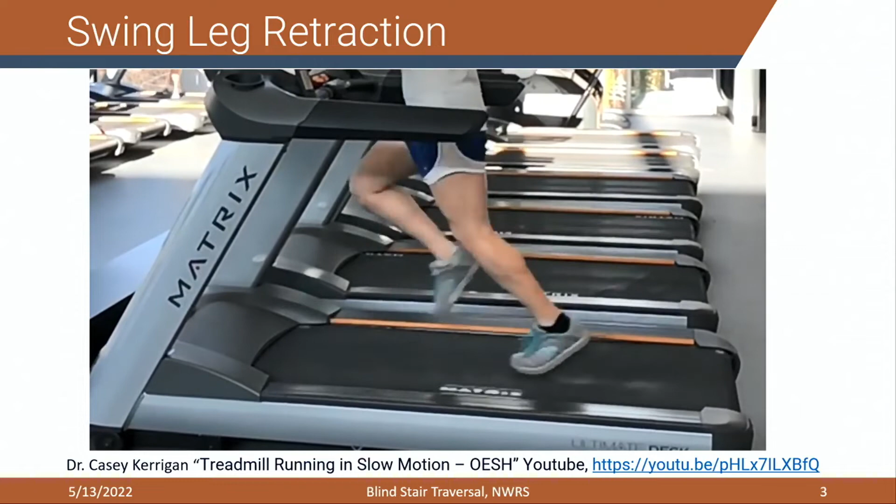One key feature we thought about is swing leg retraction. When humans and animals run, before your foot touches the ground, you reach it all the way forward and start to pull it backwards. There are a number of reasons why we do this. For one, if you minimize the difference in velocity between your foot and the ground, you'll lower the impulse when you impact it, which is better on your joints and you should lose less energy.

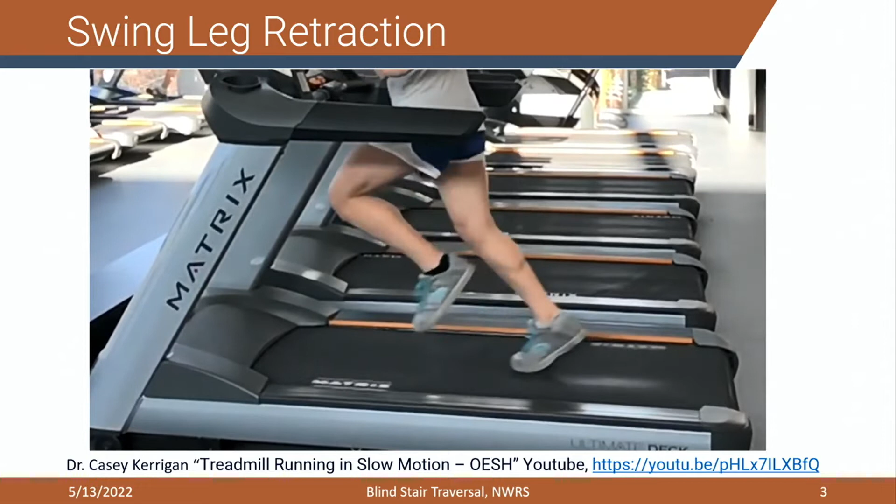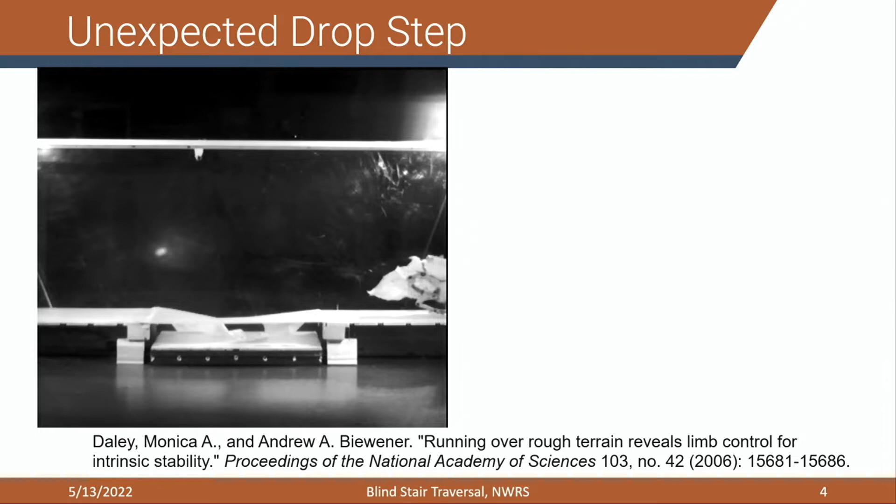But it also has a really interesting effect on your gait dynamics by swinging the leg backwards at the touchdown point. This is the classic video—if you've seen any talks from our lab over the past 8 years, you may have seen this. This is a Monica Daley experiment that is super fundamental to how we understand what's happening in gait. A guinea fowl is running along, being prodded with a broom by a grad student behind it, and there's tissue paper over a gap.

So they think they're just running on flat ground, but as soon as they try to put the foot on it, it breaks through. What you're studying here is how does the bird respond to an error in perception—the ground is actually lower than it thought it was. What does it do? A really interesting thing is if you look at the leg angle, it's sweeping the leg angle back.

You can illustrate this with some still frames: if you're up above the ground, you have a steep leg angle, and it gets shallow, then gets steeper and steeper as you swing it back.

So what this does is it gives you what we call a preflex—a pre-computed reflex. If the ground is higher, you get a shallow leg angle. If the ground's lower, you have a steeper leg angle. So you're basically able to react to the ground without sensing it in any way, altering your gait dynamics so you can recover over the next couple steps. So we thought this was going on. Let's jump back now and look at how this all appeared.

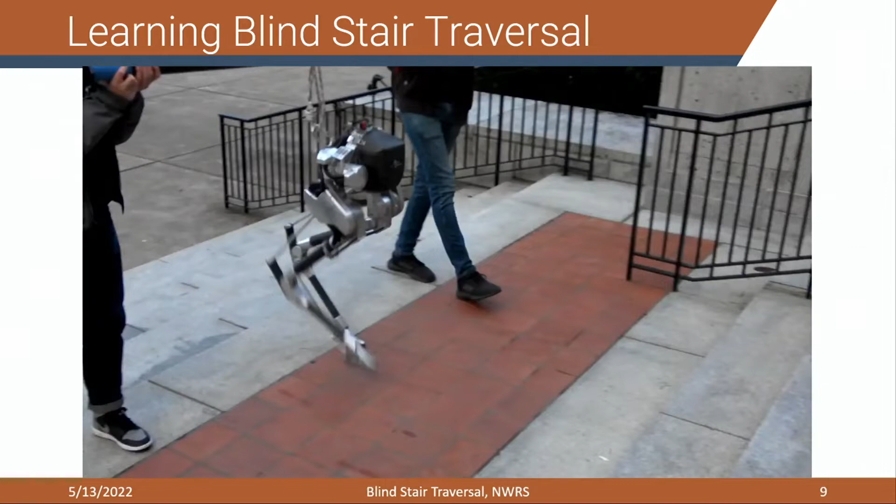And some more videos. And we found it even extrapolated to at least single step downs well outside of the training distribution, or 1 foot always up, 1 foot always down. It was able to handle that pretty cleanly.

Or even things that aren't really stairs.

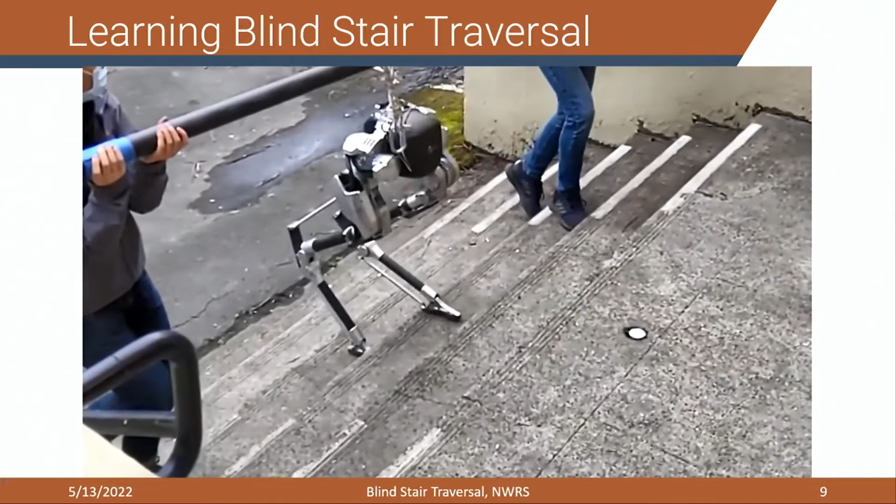So here's a nice slow motion of that phenomenon where it doesn't quite make it up a step. So we see here it's about to catch this toe. And it tries to put force on the heel, but it's not on the stair.

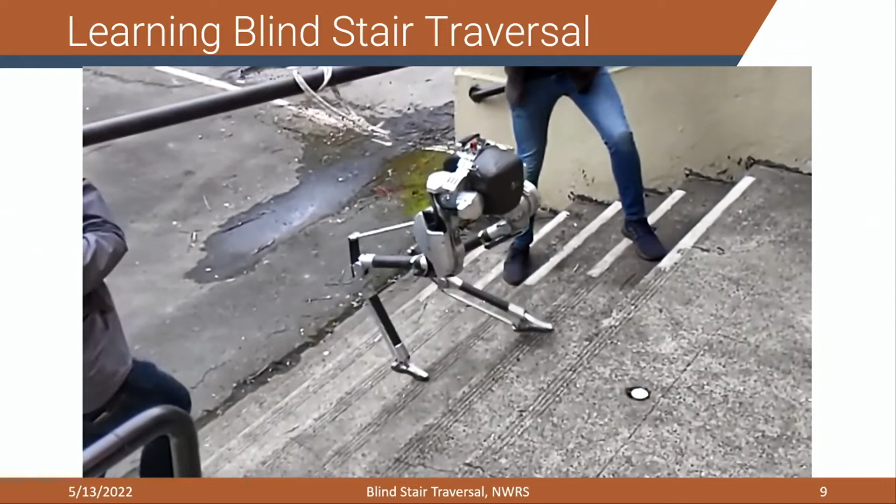It'll catch itself, and Jeremy and John, trying to support it with the pole, are trying to react as quickly as they can. And it's able to make its way back up.

And so coming back, we had this idea that swing leg retraction is part of what's going on. So we can actually inspect these behaviors.

So we can't really tell what it's doing. This is a giant black box. But we can at least look at what it's chosen to do.

And so this is really exciting to see, but we can't say this is what's making it work. There's lots of different things it figured out, but it's just really exciting to me to be able to see some behaviors come out of these reinforcement learning problems that are biologically recognizable. All right, and with that, I'd like to thank you for your time and ask you any questions.

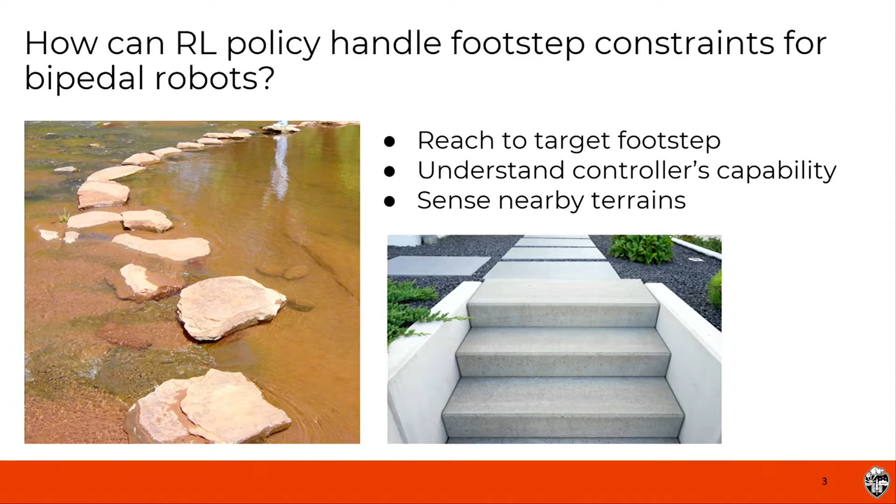To be able to handle such constraints, the robot and controller have to satisfy a couple goals. First, they have to reach a target footstep at every time. Second, they have to understand the controller's capabilities of where it can control the robot to land. It has to build up this knowledge of, if I'm taking a footstep right now, where am I going to land, and where am I able to take more footsteps in the future. On top of this, there has to be some sensing mechanism, like a perception system, that tells how the nearby terrain looks.

In this work, we're really trying to figure out a control hierarchy towards this goal by addressing the first two points. For the first point, we wanted a control policy conditioned on the footstep. We abstract the policy so we can tell it where Cassie wants to land, send this command to the policy, and the foot will actually land at that particular touchdown location. We try to abstract the policy training around footstep commands, and we train this policy in simulation.

As we saw earlier, we have this sim-to-real pipeline built up, and we're able to train Cassie to learn a range of footstep locations. This policy explicitly takes in footstep commands, represented as step angle and direction, as inputs. These commands represent the immediate next touchdown location for the robot—in other words, the policy only knows one footstep command in front of it. The video basically shows we're able to train this policy in simulation.

And similarly, with the help of dynamics randomization, we're able to deploy the trained policies onto the hardware. But one thing to notice here is the underlying control is footsteps, not speed of the body. So we're just commanding the footsteps relative to that walking direction, such as forward walking or side walking.

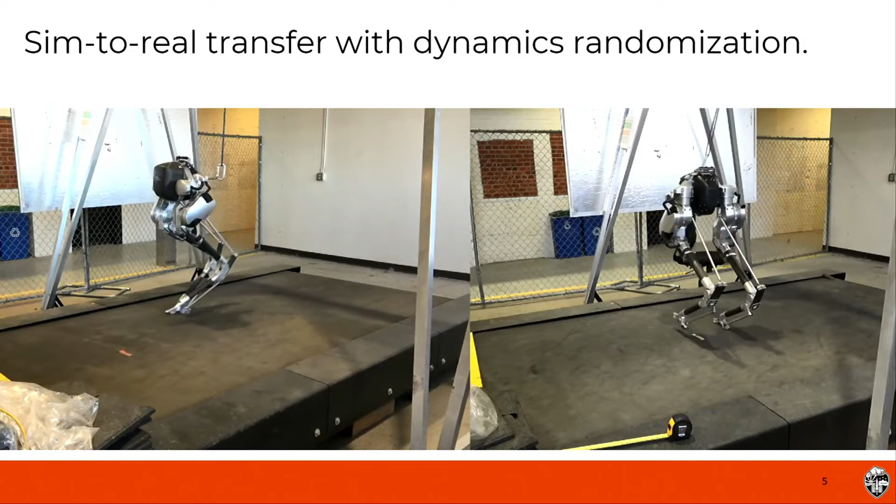Being able to train these policies, we have some unique properties coming out from the policy. First of all, we see that the robustness remains. So if we command Cassie to step in place, as the left video shows, Cassie will actually step in place while maintaining a step length of 0. It's on uneven terrain underneath, but it's able to maintain balance and try to maintain an upright body posture.

And the second video on the right actually shows Cassie can do some intentional footstep maneuvers, such as going forward half a meter at a time, doing this 1-2 step gathering motion.

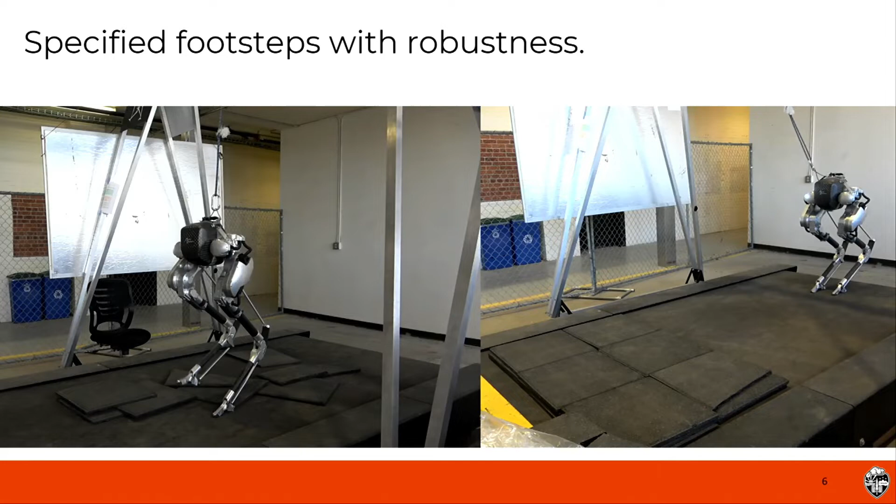So when we have the policy trained to land at particular foot touchdown locations, the next step we think about is how to build up this knowledge to have a multi-footstep behavior and approach stairs, or stepping stones better, so the dynamics work out through the constraints on the ground. One way to do that is we try to train this transition model that predicts the step accuracy given the robot states.

So this is given that we already have the trained policy. We just source the data offline and forward simulate this policy many times, and we can build up this transition model, basically mapping the robot dynamic states into the step accuracy.

And this video basically shows that step accuracies are updated at every touchdown. So the green shows that if the robot chose that command, those are the commands with high accuracy to land, and the red shows the other way.

Given this information, we can recursively build this up for multiple steps in the future. And the nature of this prediction also aligns really well with the terrain information, kind of square-like, and it overlaps together in the same language.

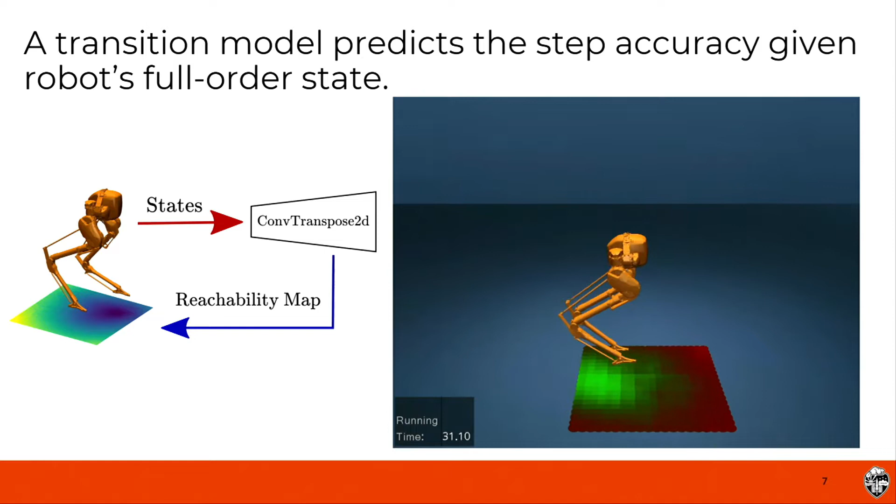So far we've covered the work towards ICRA, and these are kind of the new work we have recently.

So we show this policy trained and it can be transferred onto hardware, but it's kind of open loop behavior. We can't tell how well the policy is being executed online. So in order to evaluate this policy in the real world, we actually add an overhead camera to tell the available footstep targets on the treadmill.

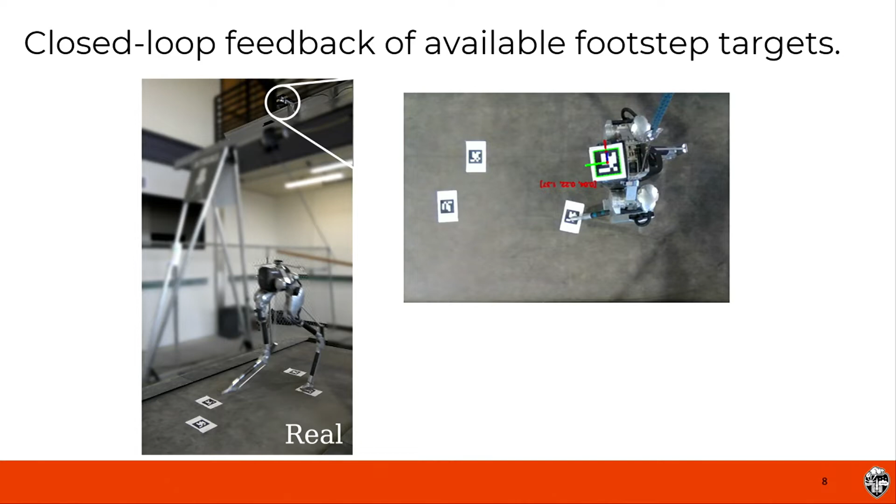So we use these marker fiducials to tell the available footsteps. And along with this camera setup, we decompose the network into a useful structure where the proprioceptive states, or the joint states, are fed into this dynamic module.

So here we actually see the emerging behavior that when we increase the commands for stepping further, the swing time actually increases, which is very aligned to what we do as we walk forward.

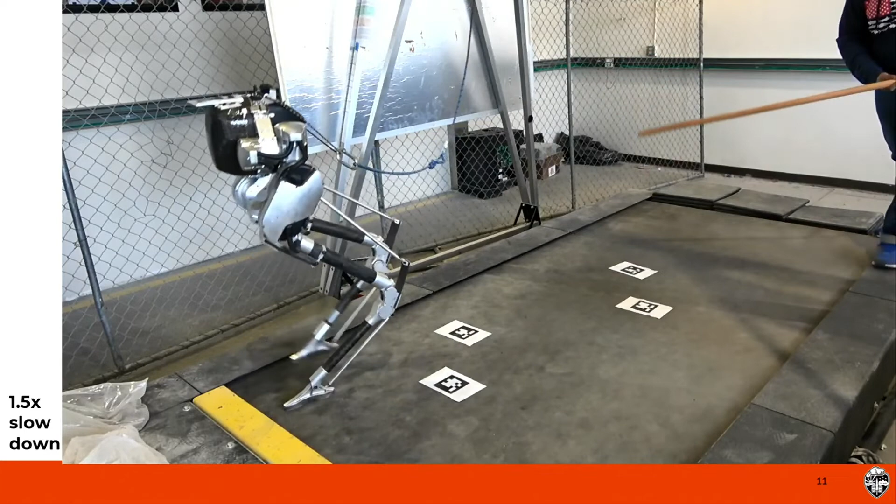And as a result, Cassie can walk through this stepping stone environment. So we're able to show Cassie is able to walk across the stepping stone environments, with this kind of slowed down motion. And using this code pipeline and reinforcement learning, we really show that reinforcement learning is capable of doing this positioning motion while doing highly dynamic maneuvers.

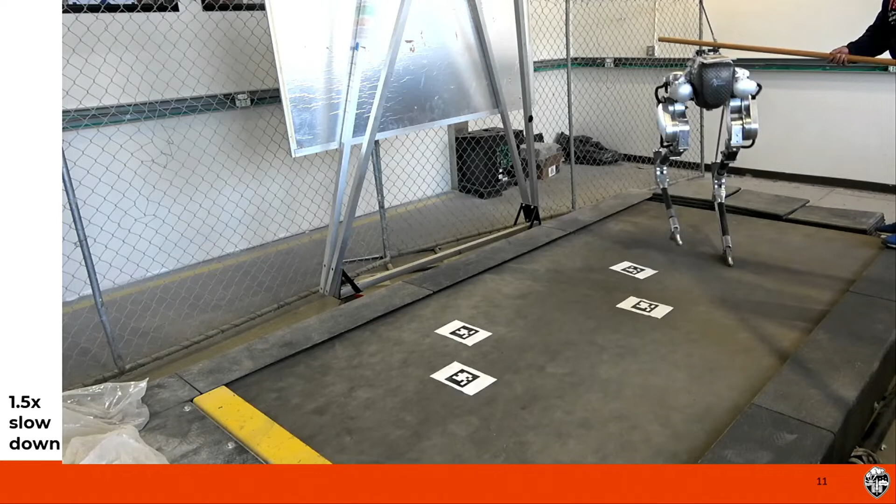And this ensures us we can build upon the previous work and then do more interesting planning work on top of this. That's it. Any questions?

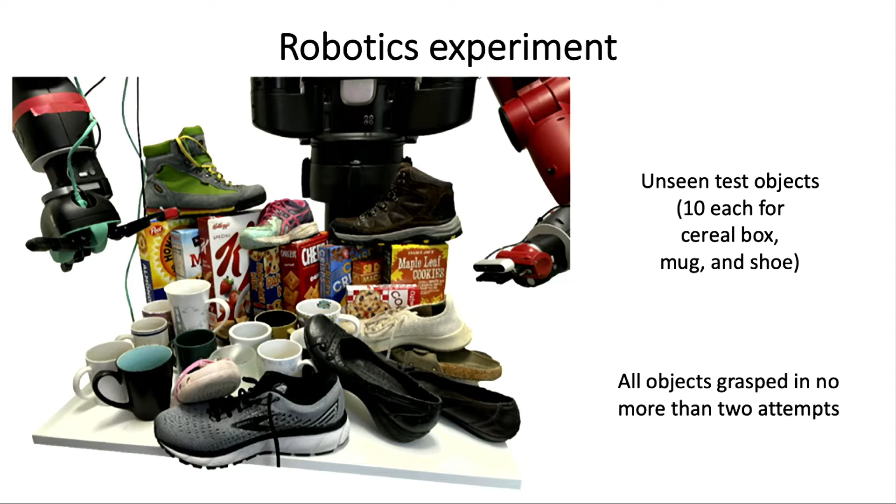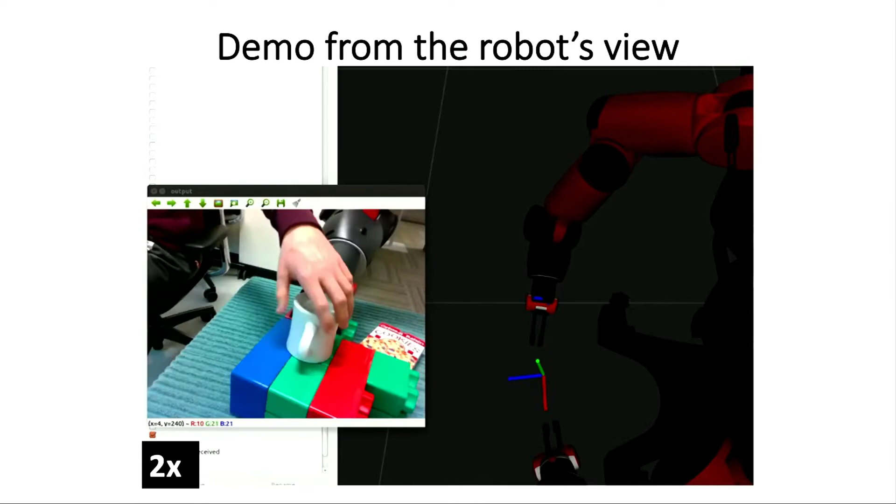Same thing. Since this is a robotics conference, we're going to talk about robots. So here's a robot in Redmond. We decided to go see if we can do some grasping, just to show you that the poses are pretty good. Here the mug is within the grasp of the robot, and you can see in 3D on the right in RViz that the actual pose is staying where it should be. So it should be enough for doing some grasping.

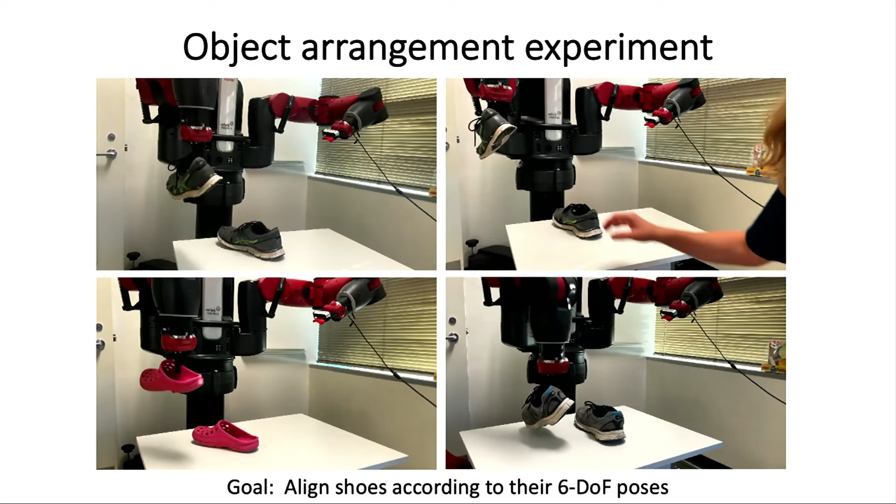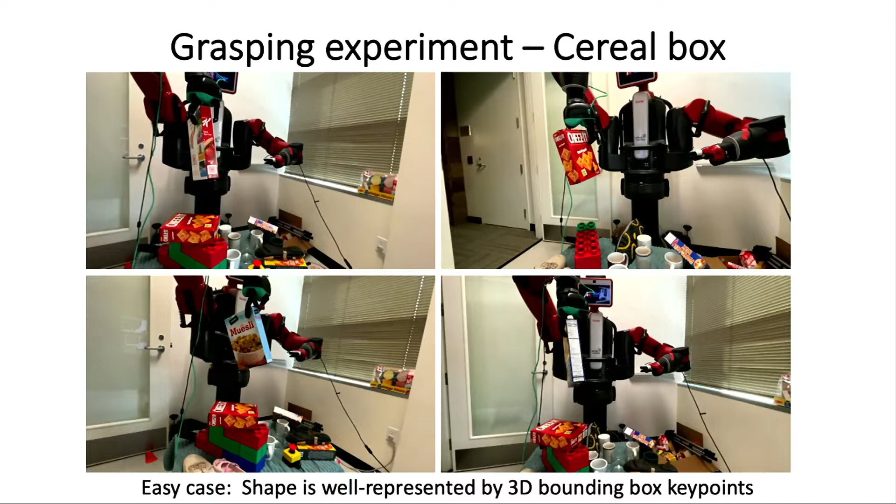You can see here we have some matching—shoes, poses are being matched by the robot on rotation and placed to the left of the shoe. So Baxter is almost ready for cleaning my room. And then some more grasping, with these being with a really big gripper, which really helps to be successful with boxes and mugs. Mugs were a little scary because these can break, but it's a good gripper, so fairly exciting. And then some shoes.

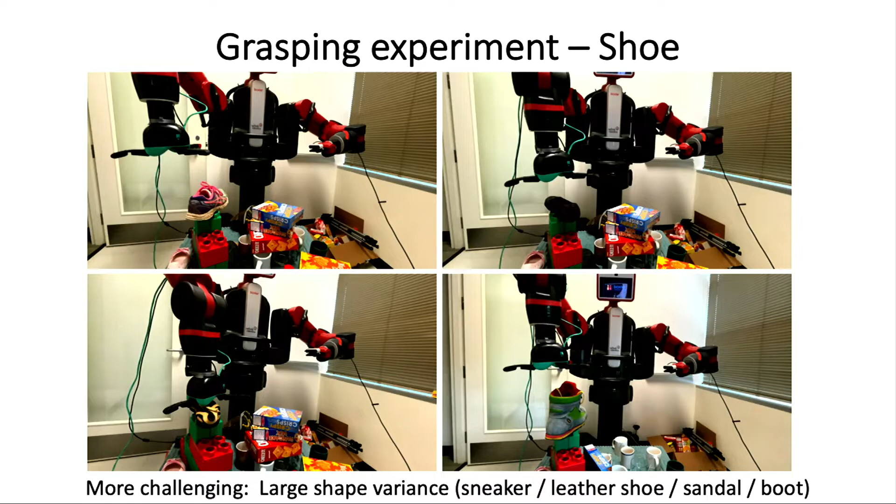Yeah, so it's all hard coded. The robot goes 15 centimeters above the centroid, then it closes its gripper, then it lifts it up, and then puts it in the garbage bin or something like that. But the next step would be to use the computer vision system and the learning method together to be able to do better grasp.

Cool. Felix, thank you, speaker. How does this method fare towards comparing it with both PoseCNN or DenseFusion, who have that?

Yeah. So for PoseCNN, because it's a specific instance of an object, you will get not such a good pose in the end because PoseCNN is a little finicky. You have to work with a very specific object, whereas here you can pick any shoes. So all these shoes here were shoes that were not part of the training set. You could download this, pick a shoe, put it in front of your robot, run the code, and then pick it up. Whereas PoseCNN, you need to find the cracker box that it was trained on, and if they change their commercial ads and change all the things, it doesn't recognize it anymore because Cheez-It has decided to go green instead of red or something like that.

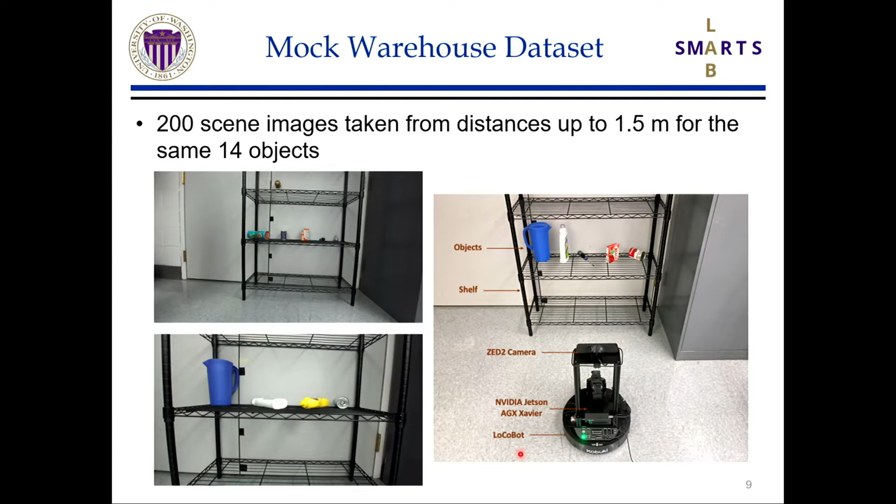So we collect images in this setup and test models on this setup. We also deploy our method on a Locobot and test it in the warehouse environment. On these warehouse images, we observed that the performance of sparse PI features, from models trained using living room images, remains unchanged, while the performance of faster RCNN and the domain adaptive counterpart both reduce, especially in terms of accuracy, in the unseen warehouse environment.

Let's look at some of the issues associated with the methods we've covered. For sparse PI, we observe that segmentation map quality affects performance, which could be attributed to these reasons. For example, for objects like forks and spoons, segmentation maps can look very similar, or they may be incomplete due to segmentation errors. Varying camera poses can lead to the same segmentation maps for different objects, making it difficult for a 2D shape-based method to distinguish between them.

Variations due to large object and camera poses also affect end-to-end object detection methods. And of course, changes in object appearance is also something that deep learning-based methods are susceptible to. But despite all this, we see that our method performs well.

So let's look at a video demonstrating results. We consider a setup of 5 objects in the warehouse and start from a distance of 1.5 meters. We note that sparse PI recognizes all the objects correctly, whereas faster RCNN makes certain mistakes or detects extra objects.

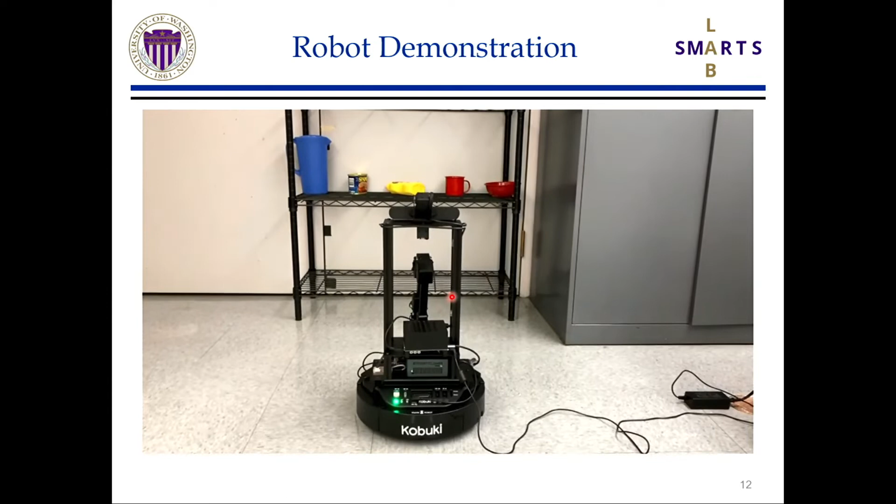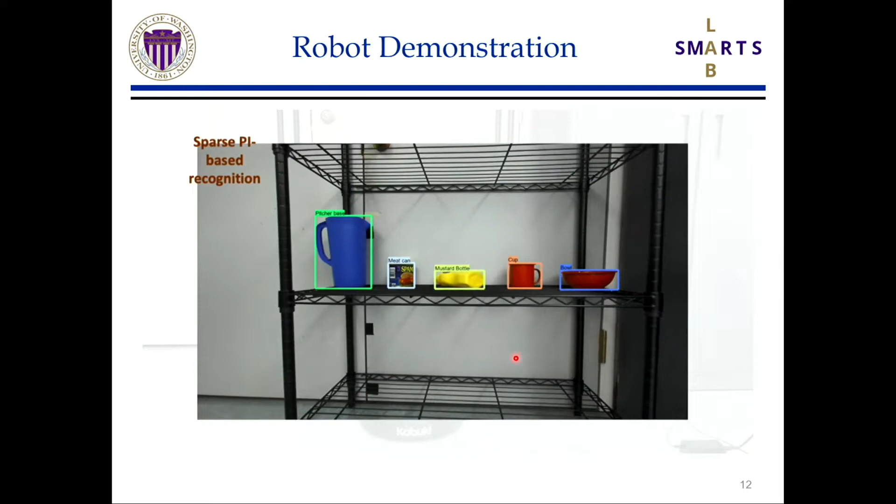One might think that when images are taken from a shorter distance, performance might be better for faster RCNN. But even as the robot moves closer to a distance of 0.8 meters, sparse PI still recognizes objects correctly, whereas faster RCNN continues to make recognition errors.

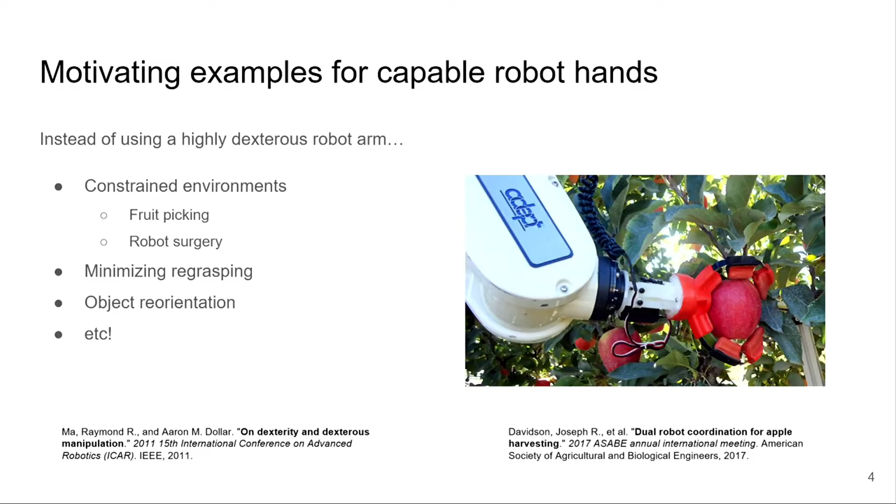A really good example of this is fruit picking. So for apples, you could talk to my colleague Nigel over there about apple picking more in depth. But you want to keep the stem on, so you have to pull and twist to get the right torsion to get the stem off. Otherwise, if the stem comes off, it's failed. No one wants to buy it. It makes it more susceptible to disease and stuff.

So now let's go into manipulation a little bit. When I'm talking about manipulation, I'm talking specifically about precision manipulation using the distal link, no palm. My kind of manipulation is going to be on a 2D surface, and it's basically looking at the relative movement between an object and a stationary palm. So this is all fingers doing stuff to the object.

And so when we're considering our arm-hand system and how complex you want things to get, what you'll be asking is kind of like what kind of hand should I use with what kind of complexity and capabilities, and how should we use it for the arm and the situation that we have. But the problem is that we need to understand what the hand is capable of first.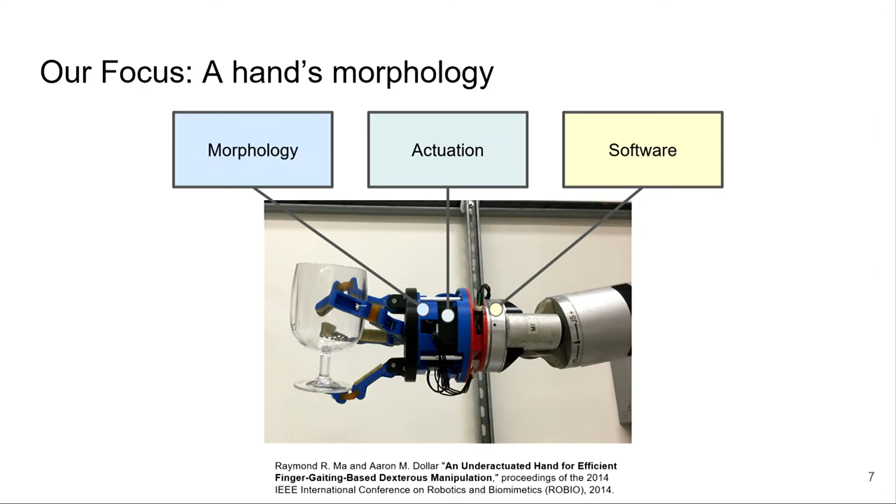When we look at a robot hand, I break it into 3 parts. There's more, but this is, if you look at any robot hand, it's going to have this: the morphology, so the build of the hand itself; the actuation, so the motors and perhaps the tendons or whatever is actually moving those fingers; and then the software, so the thing that actually does stuff with the hand, whatever you want to do.

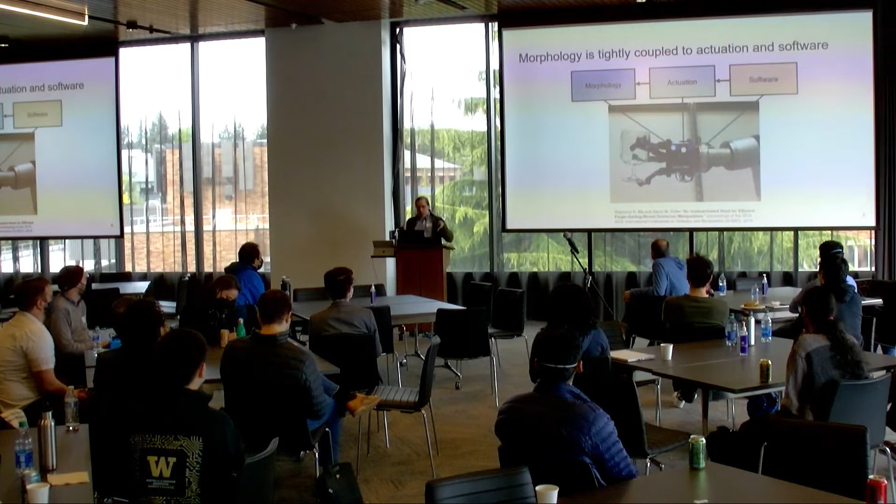So I care about morphology, but the problem is that morphology is tightly coupled to actuation. I mean, think about it, if you don't put motors on a hand, it's not going to move. That's just it. That's the problem that I want to solve because I care about finding out what the hand itself, what potential it brings.

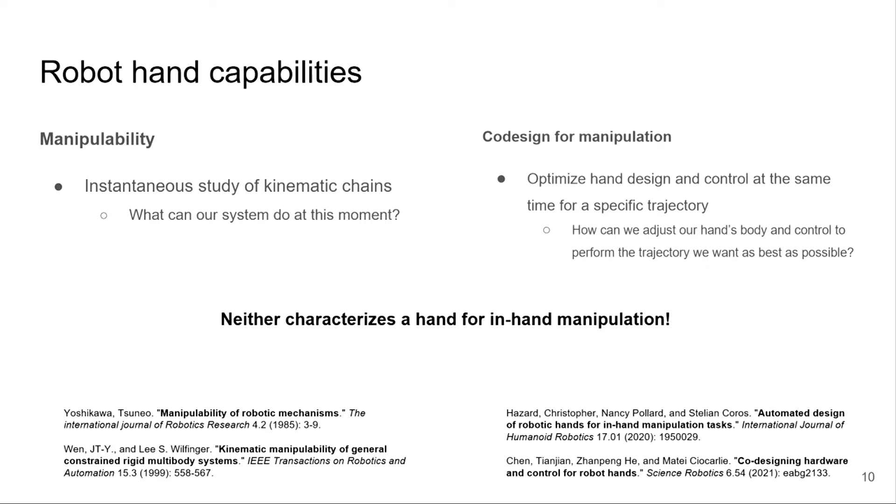So previous work, I highlight 2 here: manipulability, and co-design for manipulation. These works look at what a hand can do in terms of manipulation tasks, which is what I care about, but they don't look at characterizing the hand specifically for manipulation. Manipulability is kind of like an instantaneous thing: I'm at this position, with all these different parameters, what can I do? Co-designing for manipulation typically looks at optimizing a hand's design and control at the same time to do some trajectory. So we're not actually getting a hand design and saying, okay, this has potential here, it's able to do this, and so on.

This is an object-centric approach compared to a lot of other approaches—we don't have time to go into them—that look at it from a task-based way of metricizing the hands.

And so what this makes us able to do is we're able to compare robot hands to each other, and it makes it pretty versatile. We'll get into that in a second.

When we get that data, the trajectory, we run several metrics on it. First off, we care about the distance that it went in that desired direction, which is generally just the projection of the trajectory onto that path. We're looking at the efficiency, so we take the trajectory, we look at the total distance, and then look at the arc length to see efficiency there, Frechet distance, maximum error, and then maximum rotation achieved in the trial.

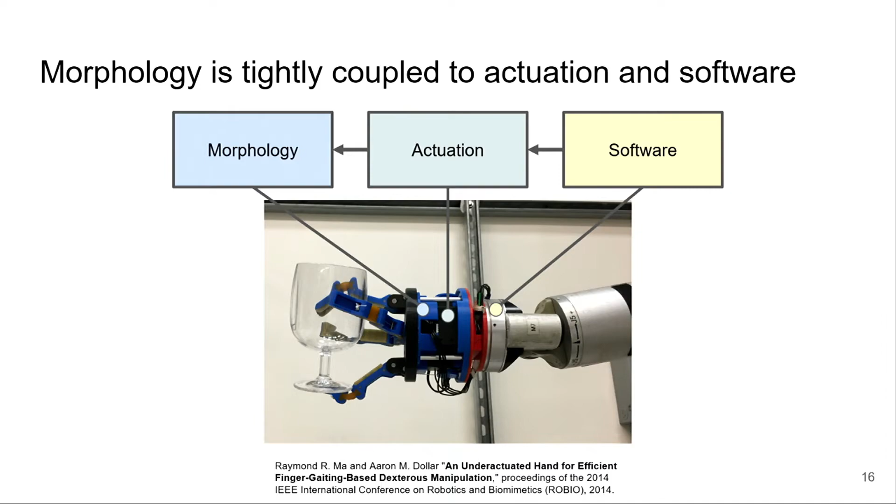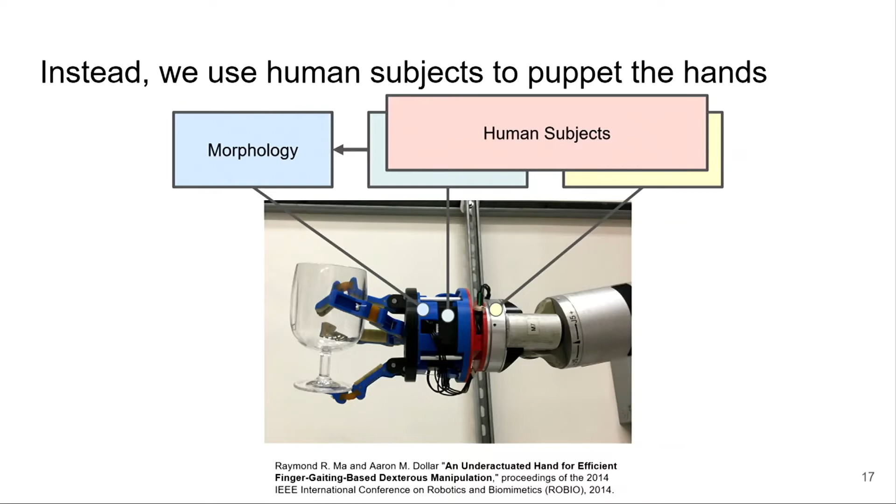So just going back, we have this problem again where morphology is tightly coupled to the actuation and the software, right? One way that we are going about this is we're going to replace the actuation and the software with a human study design. So enter something we call physical human interactive guidance.

And the really nice thing about this is that it has really high transparency inside the task. As a human puppeting this, you have so much feedback about the force and everything that's going on in the interaction. You don't need the actuation or software, so we're able to look more at the hand design.

And if we use the same human subject across multiple hand designs, we get some sort of a level of normalization, right? And we're also able to, with the human subject, approximate a high level of performance that the hand can do - to kind of get the upper potential of what this hand might do.

In our study, we had several constraints. First off, the subject can't break contact after it's established. Rolling and sliding contacts are allowed, and the subjects have to stay on the side they contacted.

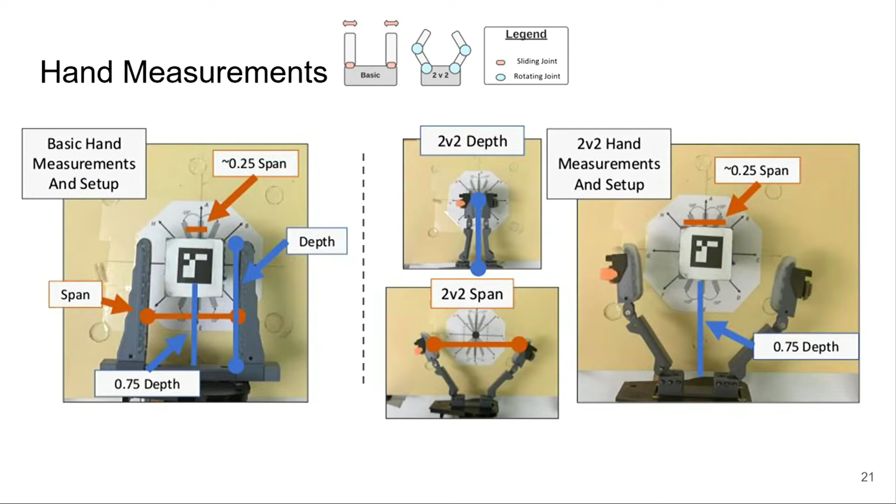So what we do instead is we normalize that space. We measure how far the hand can reach and how wide it can reach, how wide the fingers can open. And then we use that to normalize the space and also to get object size and initial position normalized between all of our hands, so it's more of an apples to apples comparison of what's going on.

I have a poster on that, poster number 3 in the poster session, so feel free to look. But anyway, so we ran a human study. I'm not going to talk about the specifics of that study yet, but we got a bunch of trajectories that we kind of averaged over this.

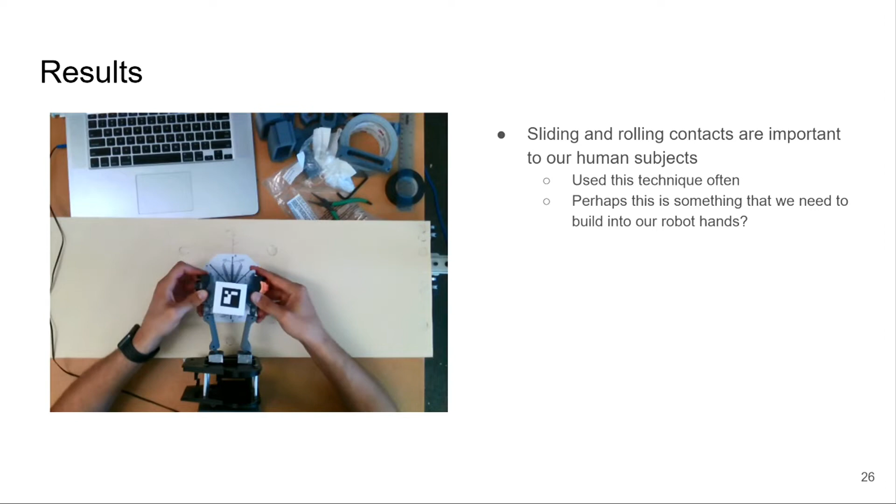And as I showed this before, humans really like sliding and rolling contacts. We did this on a bunch of hands, and it showed up everywhere. And that's about it that I have for now.

So we talked about the asterisk test as a way to characterize a hand's design for in-hand manipulation. We used humans puppeting the robot hands to avoid having to put actuation and sensors as extra variables to make this whole comparison more complicated. We used the hand measurements to normalize the space, and then all together, we look at studying the effectiveness of robot hand morphology. In the end, we want to add rotation, change up initial positions, object sizes, more hand designs. I'll stop there.

Any questions? I don't know if we have time for one. Why are you interested in the translational in-hand manipulation, but you don't have a metric for the rotational? Yeah, that's just something we're adding. It's in a paper in review right now, actually. All right, okay, thanks again. Thank you.

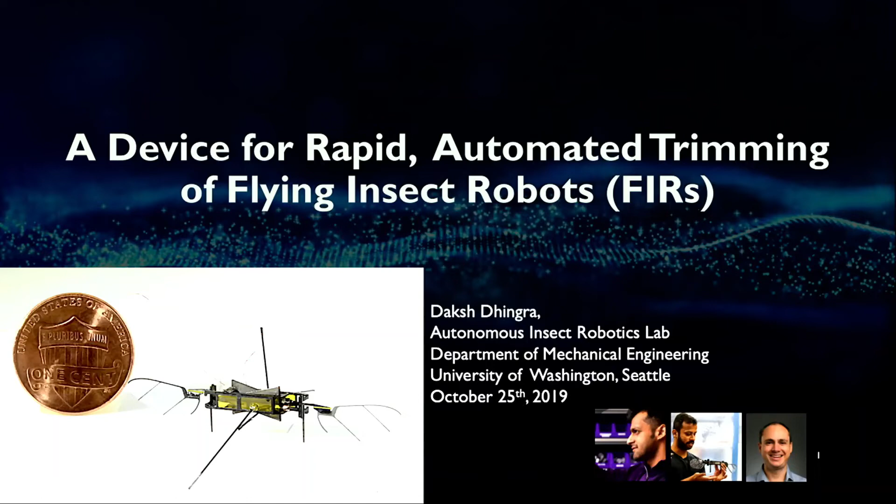All right. Hello, everyone. Since we are already on flying robots, we have seen a lot of walking robots, running robots, and a lot of ground robots. So switching to flying robots.

This is the work that we did for ICRA 2020. I'm Daksh, and I'm from the Autonomous Insect Robotics Lab. I work under the guidance of Professor Fuller. Let's get started.

So I have divided my talk into two parts. First is motivation for working on this. Second, principle of trimming.

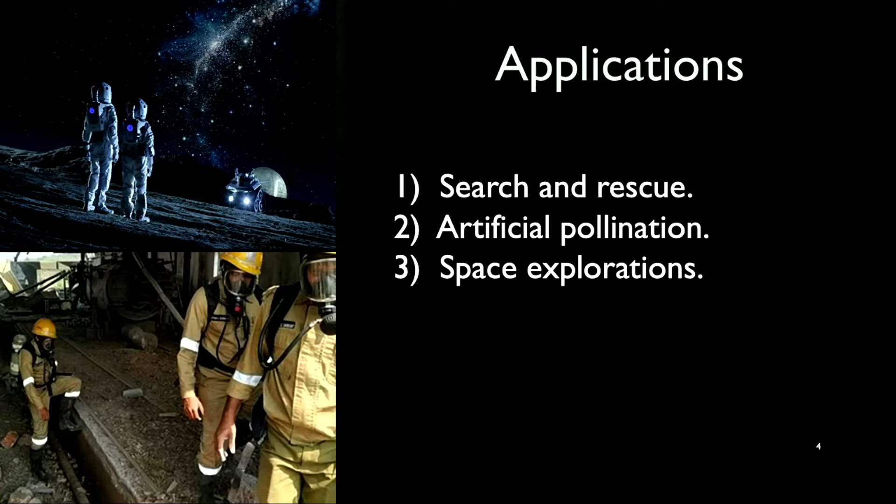Third is methods of trimming, and finally, some results. So Yash has already gone into a lot of detail into applications, so I'm just going to skip that. But yeah, we can use these robots for search and rescue operations, for artificial pollination, and for space exploration.

Okay, now let's get to trimming, the principle of trimming. First, I would like to tell you guys what trimming is, and for that it is always easier for me to show that with a video.

So I'm just going to play these. All right, so I just played two videos. The first one is an untrimmed flight, the second one is a trimmed flight. You can see the difference already: an untrimmed fly takes off and it tumbles, while a trimmed fly takes off straight upright.

Now, my study was how do we get from the left part of the video to the right part of the video. And for that, we need to understand what is happening on the left part. You can see that there is a torque acting on this robot, which we call bias torque. In this study, we would try to estimate what this bias torque is and then correct for it.

This bias torque is usually generated due to four things. One is manufacturing inconsistencies. Because these robots are made and assembled by hand, there is a lot of inconsistency between one actuator and another. So if they both flap at the same frequency and same amplitude, they won't necessarily produce the same lift, and because of that, there would be different torques.

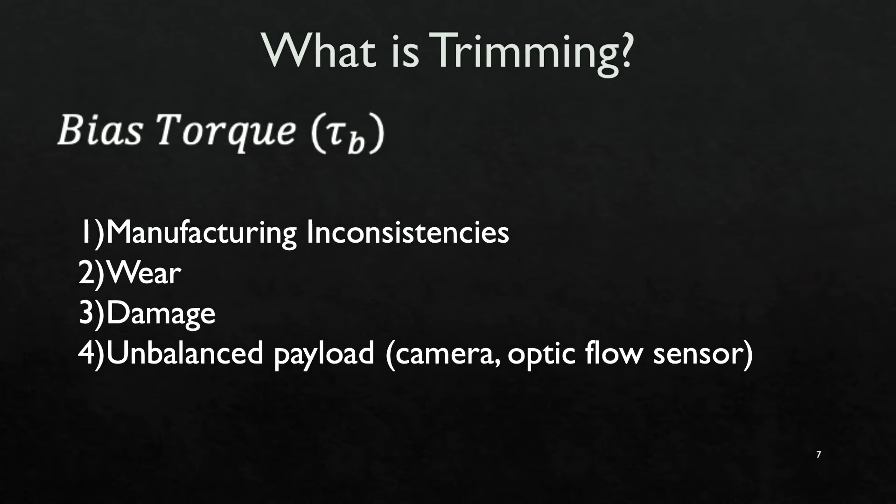Third, if there is damage to the robots, since they are so tiny and made by hand, they are also susceptible to a lot of damage. And if we put a sensor on board, just like Yash introduced, if that sensor is not right at the center of mass, there would be a bias torque because of that. So we needed a device that can correct for that in these small platforms.

All right, so we'll correct for that using some trim torques. Now you can argue, why would you need a trim torque if you have a controller that is already controlling these robots? Then that controller can correct for those bias torques.

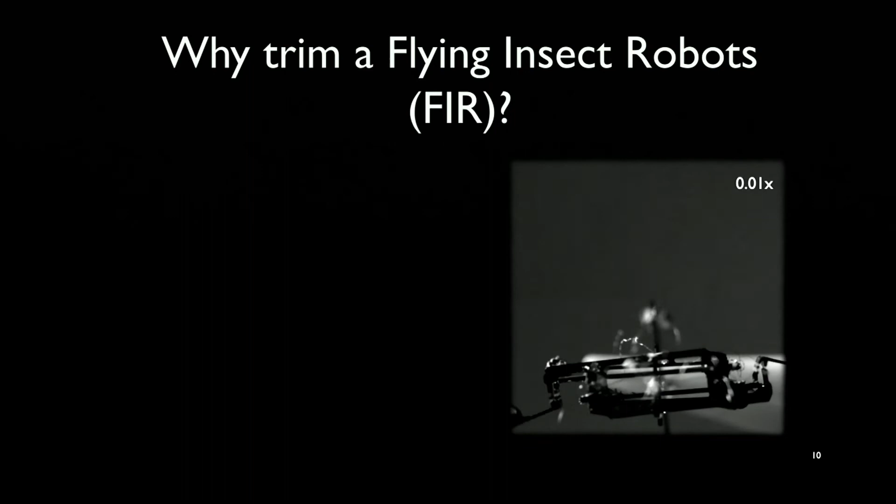But the problem with these robots is they have really fast dynamics. They are not like quad rotors, and they are manually assembled. So by the time the controller would actually correct for it, this robot would have already crashed into the ground, flown out of the mocap arena, or probably hit an obstacle. We also have limited control authority in these piezoelectric actuators that you can see in this video.

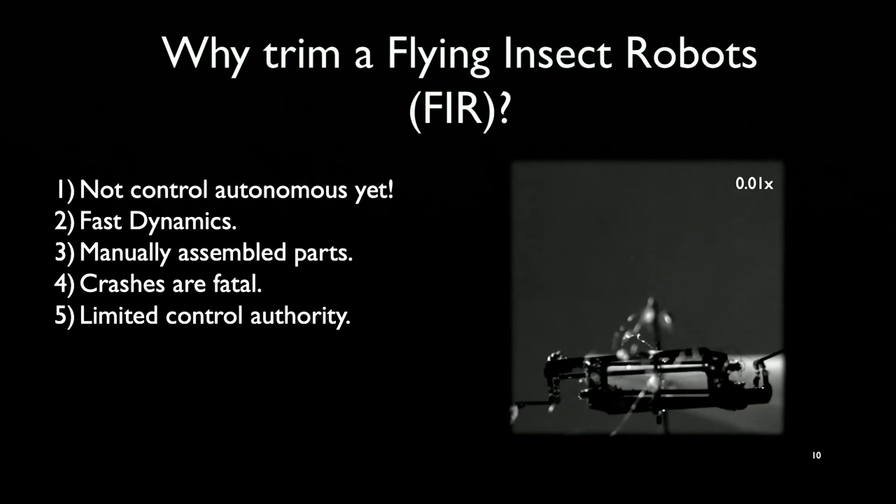All right, so how do we generate this trim torque?

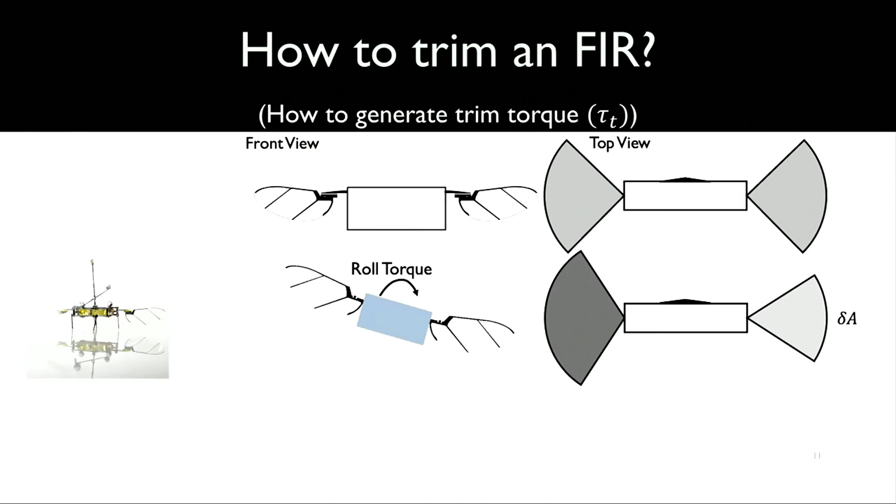The way we generate lift in this robot is by flapping wings. We give it some sinusoidal signal, and proportional to the amplitude, it flaps its wings. If you flap one wing harder than the other, you can have a roll torque. But if you flap both wings in front or behind the body of the robot, you can have some pitch torques. So that's how we introduce these trim torques.

Now let's talk about methods of trimming. Until now, the methods used for trimming were like trial and error. We would just look at the videos and see where the robot is going, and try to fix it by just looking at the video. Let's say you look at the video and feel like it seems like a 2 volts of difference. I'll just give it some 2 volts of signal and see if that corrects for it. Then you do more iterations, and maybe it would, maybe it won't. So that's why we needed a standardized way to fix that.

Pros of this method are: no special equipment needed, setup time is minimum. But the cons are: it's inaccurate, it can involve crash, and it's also very time consuming. So that's why we came up with automatic trimming.

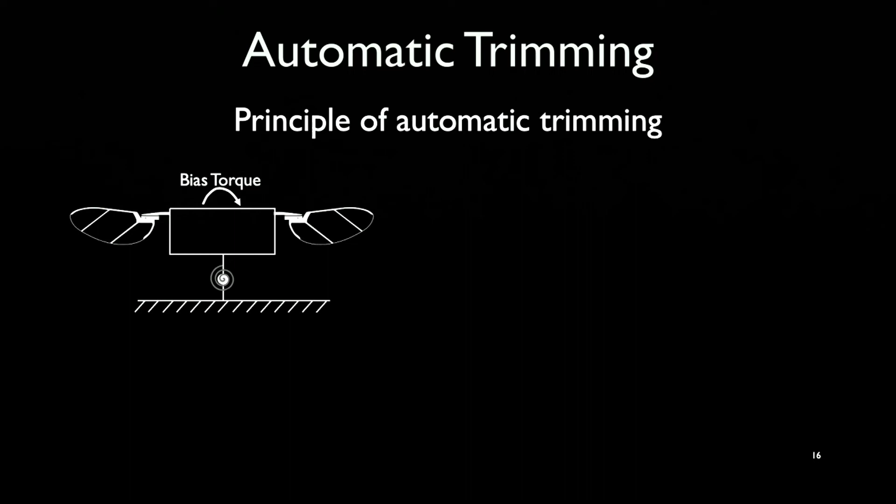The principle of operation relies on the fact that the device constrains the robot to rotate around a single axis while keeping all the other degrees of freedom fixed. This axis is subject to a spring-like restoring force so that the robot remains upright at equilibrium. In our device, there are 2 such axes, pitch and roll, so that both can be trimmed simultaneously.

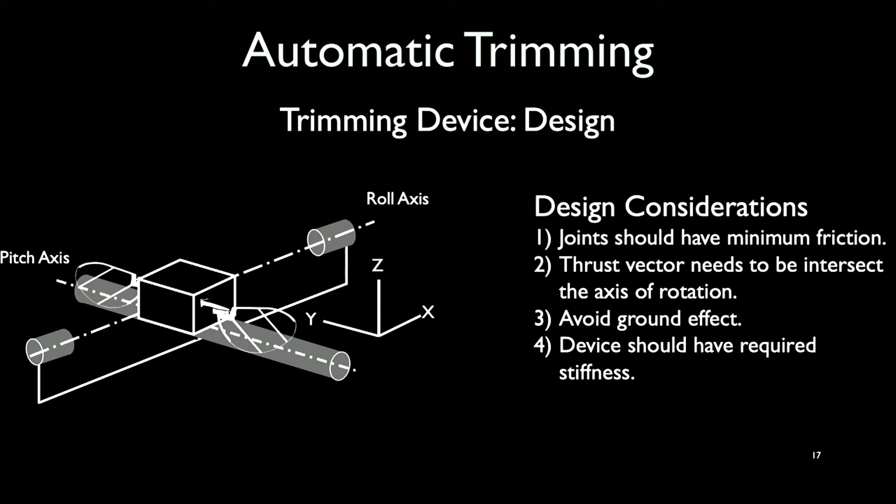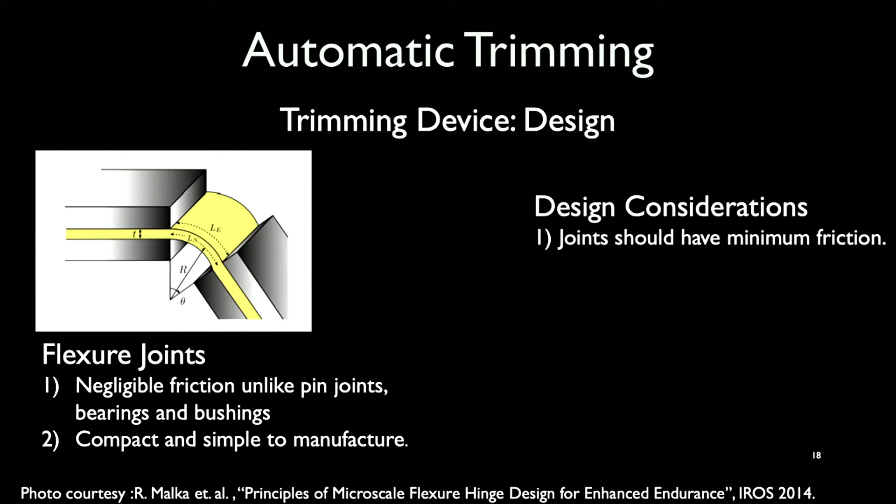We have some design considerations that we needed to take care of when designing this. One was that joints should have minimum friction. That's why we introduced some flexure joints that have negligible friction, unlike pin joints, and they are simple to manufacture.

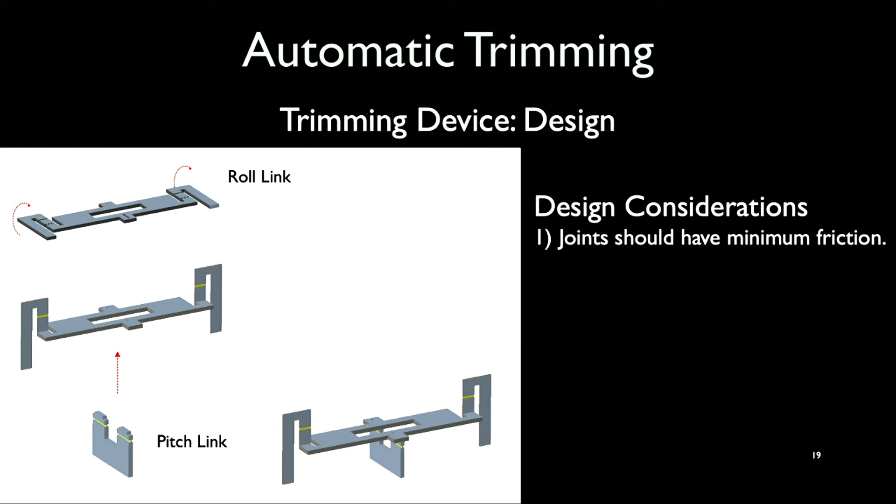Before introducing the second consideration, we designed this in a way that we have a roll link and a pitch link. The roll link can correct for trim torques in roll, and the pitch link can correct for trim torques in pitch. These are basically pin joints, but made out of flexures. So I'm saying pin joint, but it's not really a pin joint. It's a flexure joint, but it acts like one.

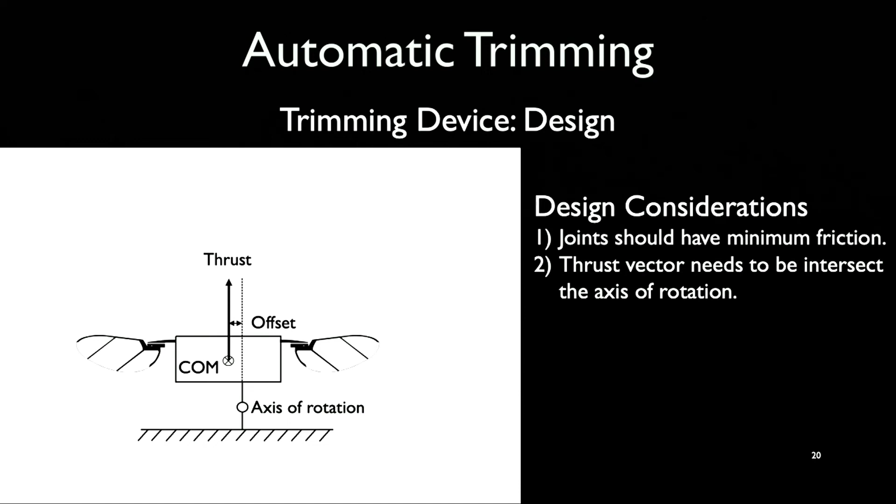The second design consideration is that the thrust vector needs to intersect the axis of rotation. In this case, you can see the thrust vector is away from the axis of rotation, and so we need a system to correct for it.

For that, we made this method where we can use the mass of the robot itself as a source of information about its positioning. If the wings are not flapping, then the lateral displacement of the center of mass induces a torque, and we can just correct for it by sliding the robot. As long as these both align, then we can turn on the device.

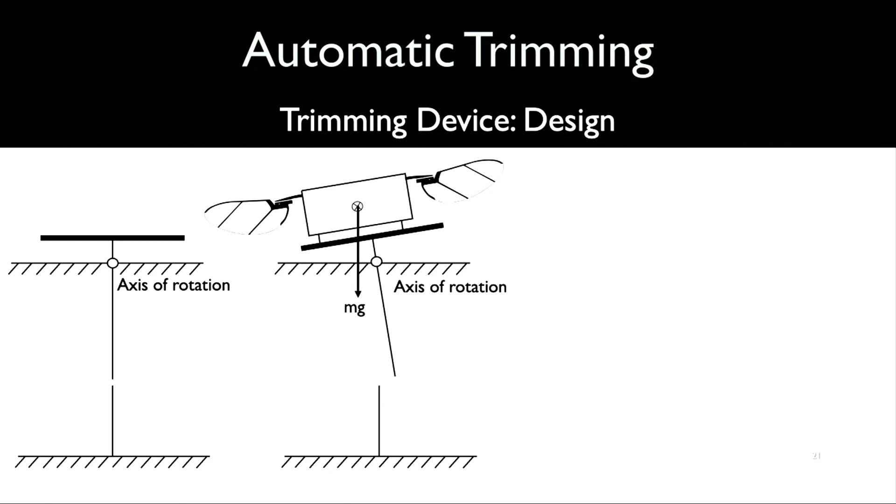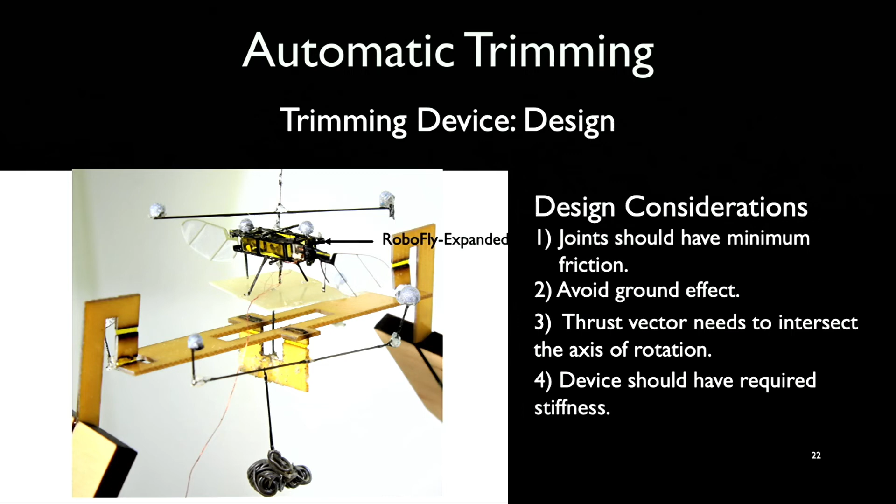So these are the design considerations. Since I'm already out of time, I'm just going to go through this really fast. This is our device, with our robot on top. This is our trimming controller that corrects for these issues. And this is the process of trimming—you can see it automatically correct for any error in orientation.

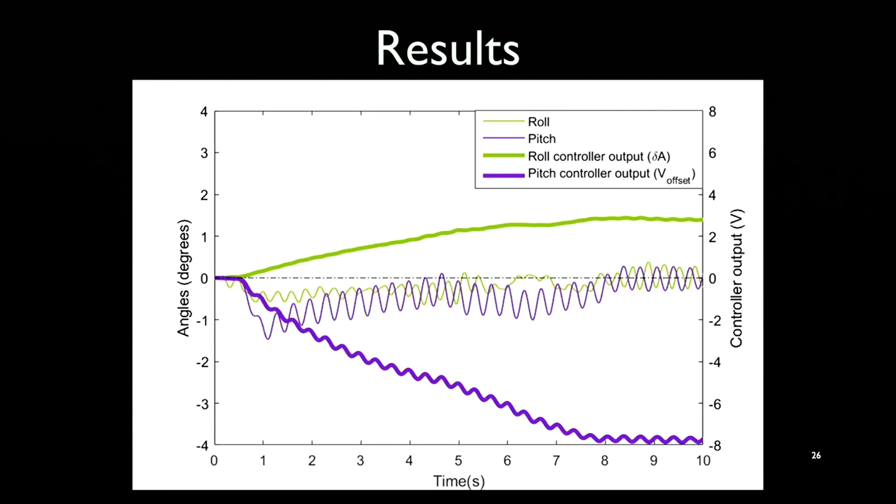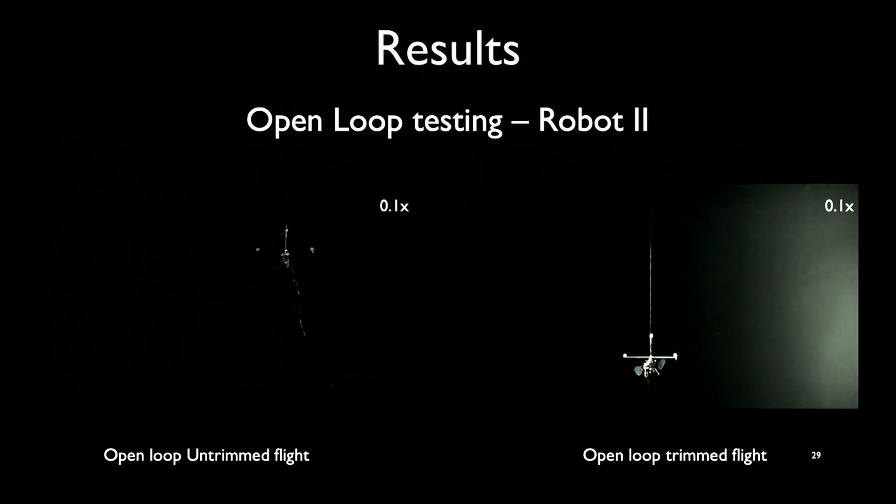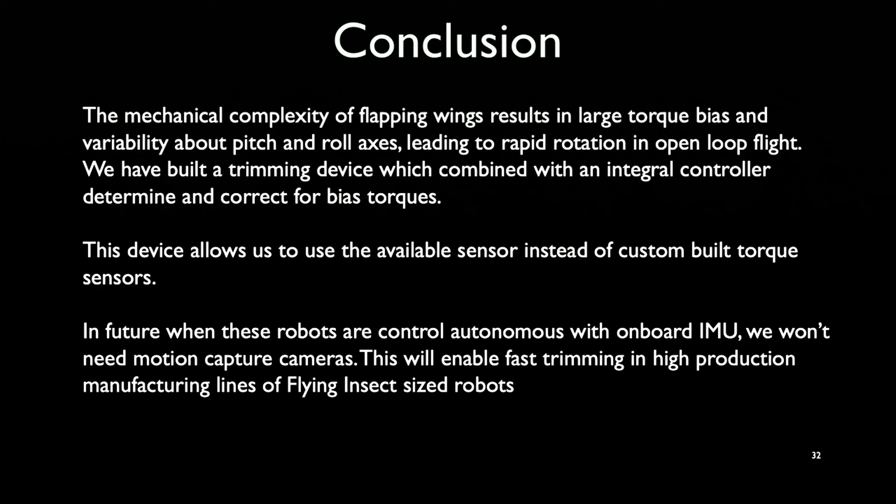All right, I think that's all I have for today. I'll take questions now. Thank you.

So there's only one motor in the robot causing the wings to oscillate, right? No, there are two—not motors, but piezoelectric actuators. Okay, thanks.

Did you consider that adding a counterbalancing weight, as opposed to modifying the controller, would add to the weight of the robot? We can do that, but the problem is these manufacturing inconsistencies change from robot to robot. For now it's like 2 micronewton meters, but for the next robot it might be 10. So we'd just be playing around with the weights a lot.

Any other question? Yes—so the trimming flexures, do you adjust those manually, or is there some sort of automatic actuation for those? Yeah, so I skipped over that last part in interest of time. Yes, we had this integral controller which was correcting for those bias torques by inducing the roll and pitch torque inside the robot itself. So those were our trim values that we calculate.

That makes sense. Do your trim offsets impact your most extreme range of behaviors you can do if you're already having to bias them in one direction? Yeah, it would. If we try to do some control that would require us to reach those limits, we'll definitely have some degrading performance because of that.